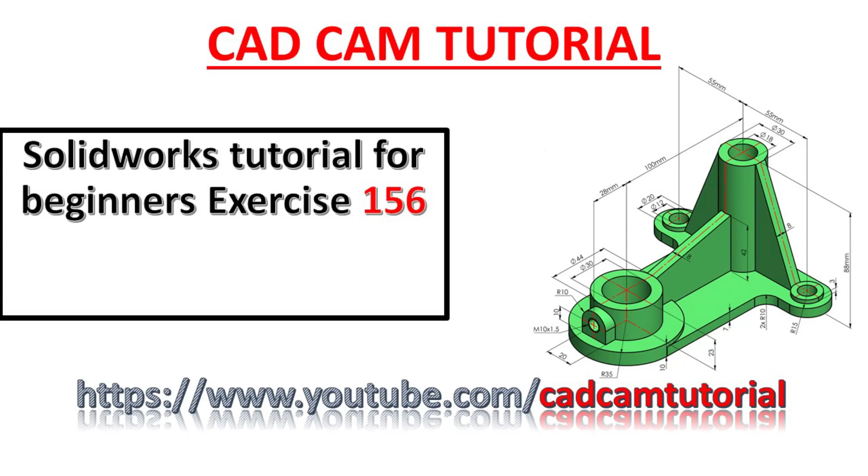So let's start to create, and here we will make this with the help of this 3D drawing isometric view. So here this is our isometric view.

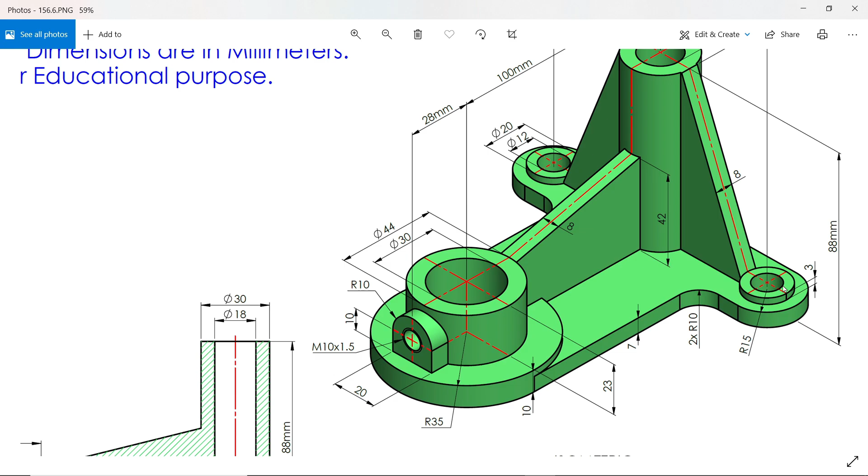Now we will start with base. See base, this end there is a circular profile and that radius 35, diameter 70. Now the second end there is a two circular profile, half circle, radius 15, see this end also, and at center there is one extruded body 10-20 diameter and this thickness 10, and this base flange thickness 7.

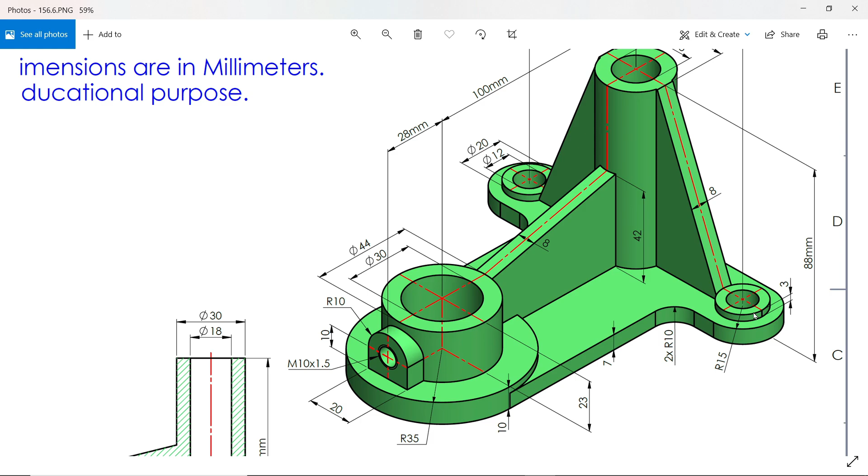So first we will make 7, then we will extrude this little more, this diameter 20 and this thickness 10 millimeters. So first we will extrude, then we will extrude this extra body.

Then at center there is one more extruded body 30 diameter, see this circle, and this height you will see from here 88 from bottom, okay, 88 from bottom.

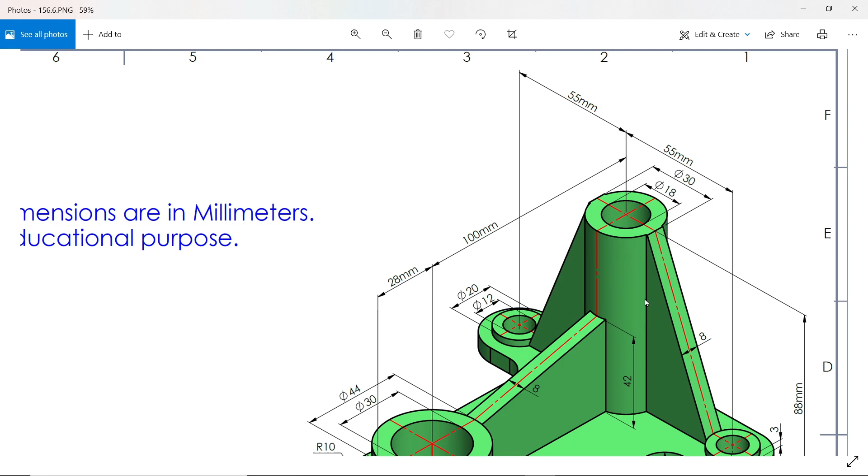So let's make this. And yes, the center distance, see this whole center distance 55, the second one also 55, and this is in one line. See here, you will see. Now first we have to select here.

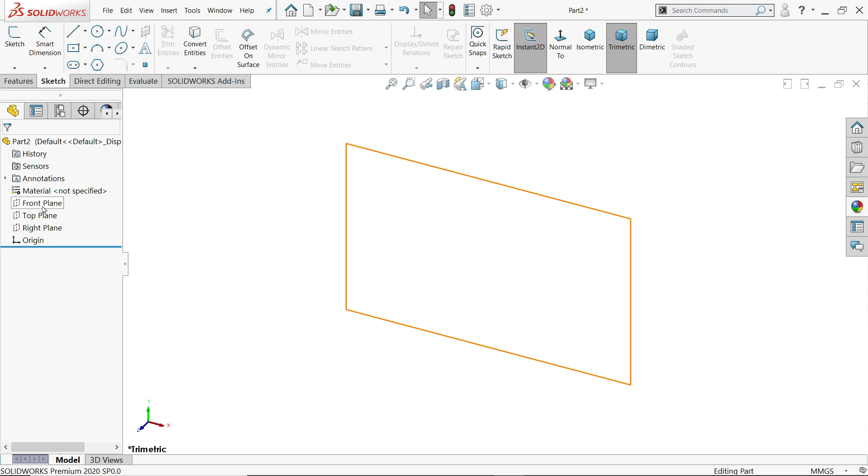Units, millimeter. Now let's start to choose any plane which is suitable. Top plane is the better option, even though you can directly choose extruded boss base feature. Now here let me choose top plane.

Now activate circle tool. Now the first circle 35 radius into 2, 70 millimeter. Now I'll show you one more feature.

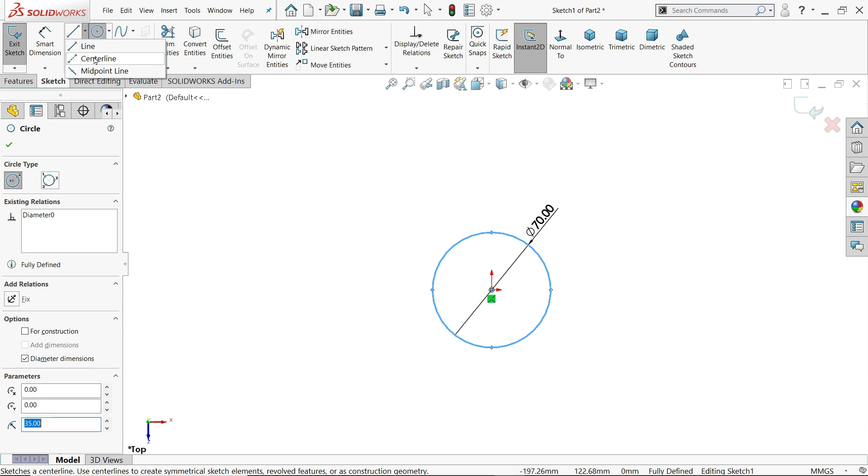Select center, activate center line, draw one center line, escape. Now choose dynamic mirror and select this line. Now whatever things we are going to make in one side, it will reflect other side.

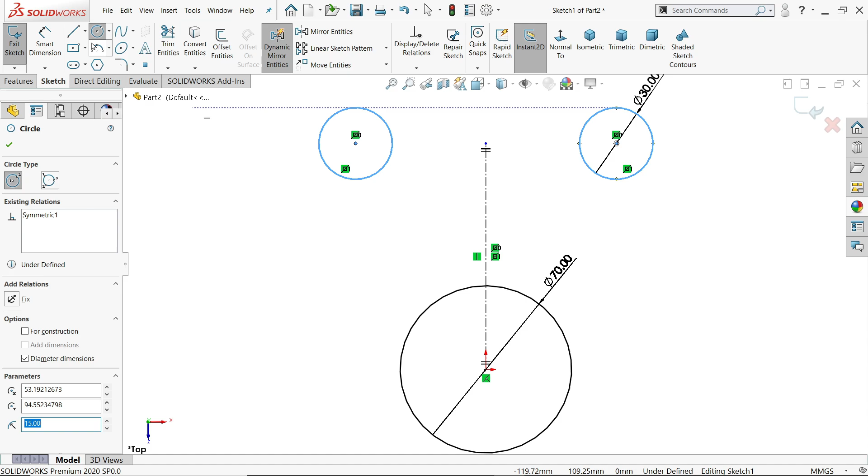Let's say activate circle. Now this diameter 30. Look, it's reflect on other side. Activate line tool.

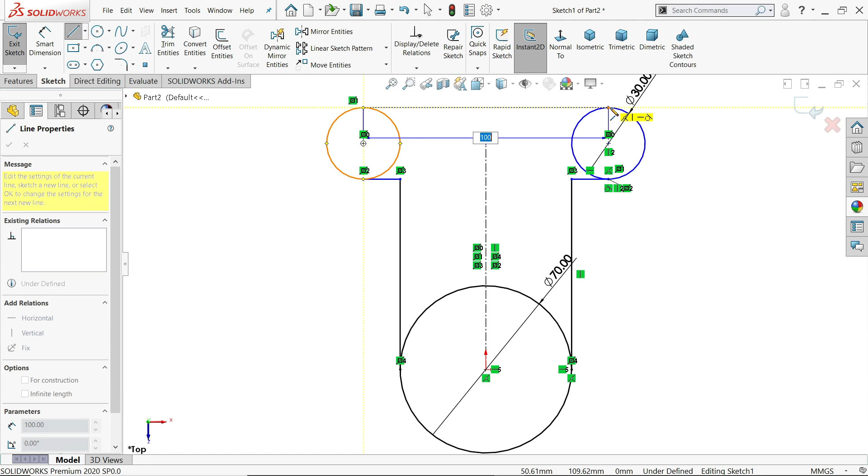Now out of this dynamic mirror, activate line tool, connect with this line, and again activate circle tool. Center also the same diameter 30 millimeter.

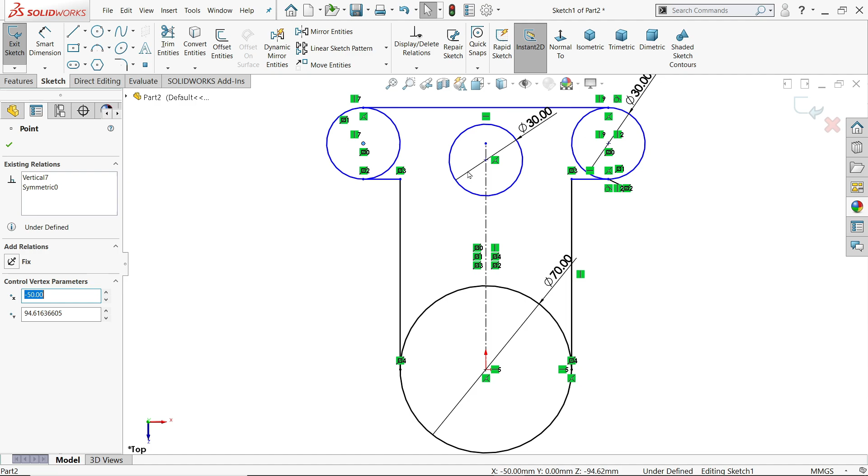But these are in one line, so I'll choose these two center points of these two circles, horizontal. Activate smart dimension tool. Now this distance from this end to this end 100 millimeter.

Now distance from here to this line, center distance, say 55 millimeter. Look.

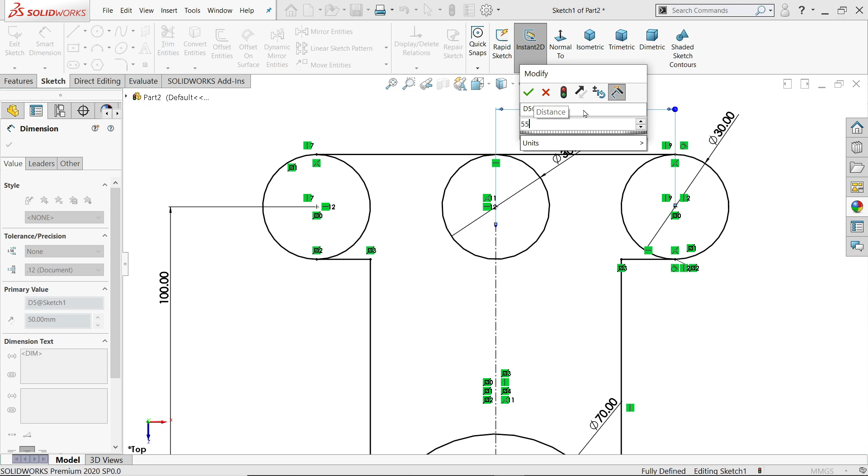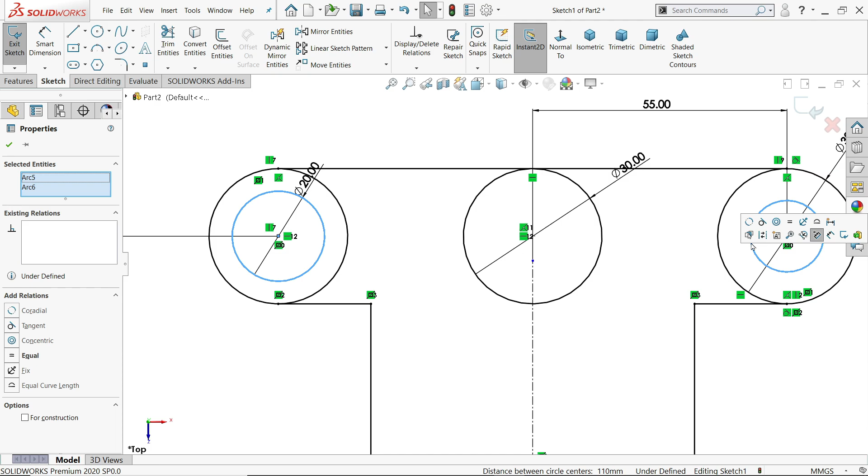Again activate circle and let me draw two more circles, 20, escape key to out. Now hold shift key and select both the circles and leave, and you will see a small window pop up here or at right left bottom, equal constraint.

See, this is fully defined sketch. If I am going to say exit, now see it is automatically going to extrude because there are too many closed profiles. So you have to choose in selected contour, you have to choose one by one all.

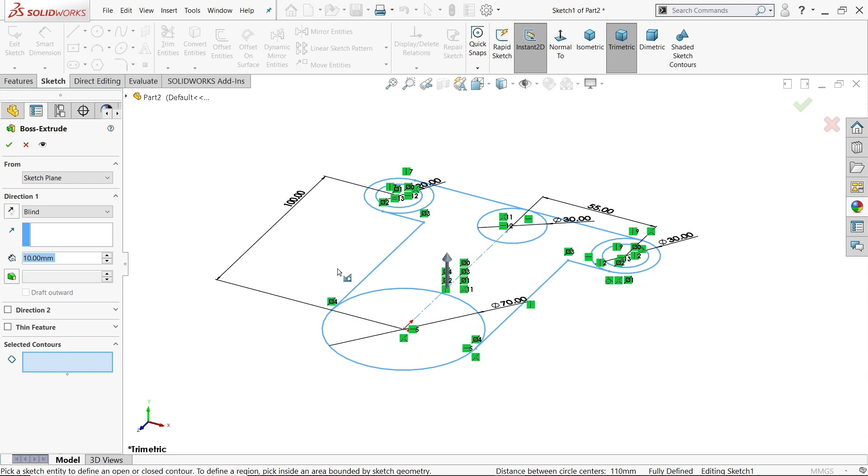Sketch plane, end condition blind, and how much depth, first is 7. Now let's define the things which we need to make.

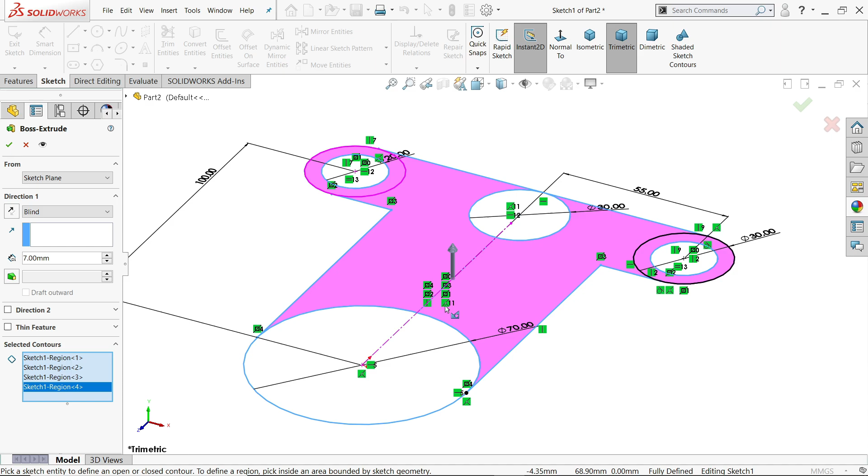Now still it is pink, means some error is there, so let's I am going to choose these all. Center one, even though you can leave, but let's say.

Delete also, it's not going to affect, but if I am leaving this there will be a problem, so let's keep this one as it is.

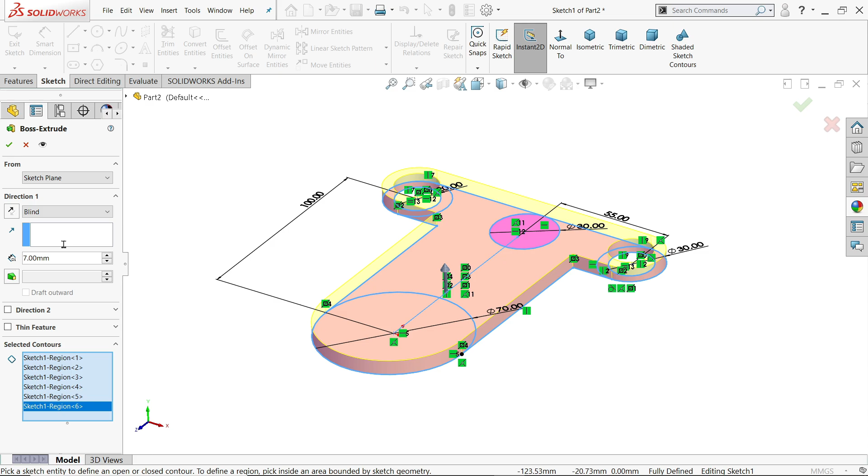7 millimeter, okay. Now again click on the same sketch, extrude.

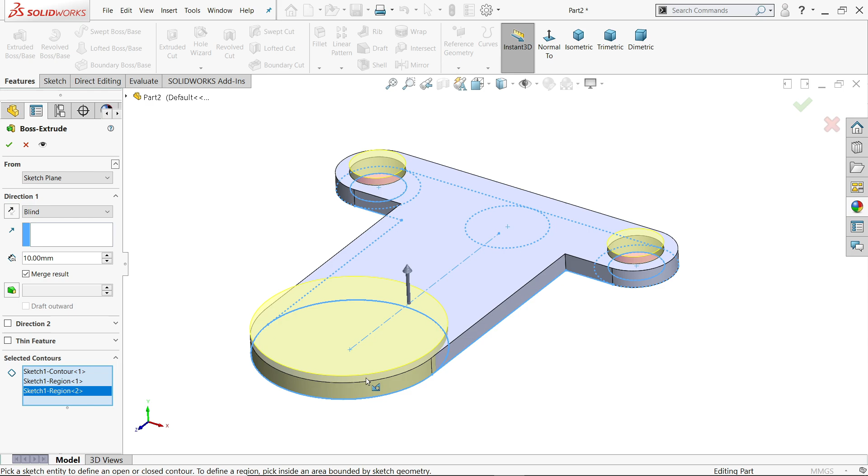This time I am going to choose in selected contour this one, this circle, center circle, this circle, and the depth end condition 10 millimeter, because this is 3 millimeter away from here and this is 10 millimeter. Keep results merge, say yes. Look.

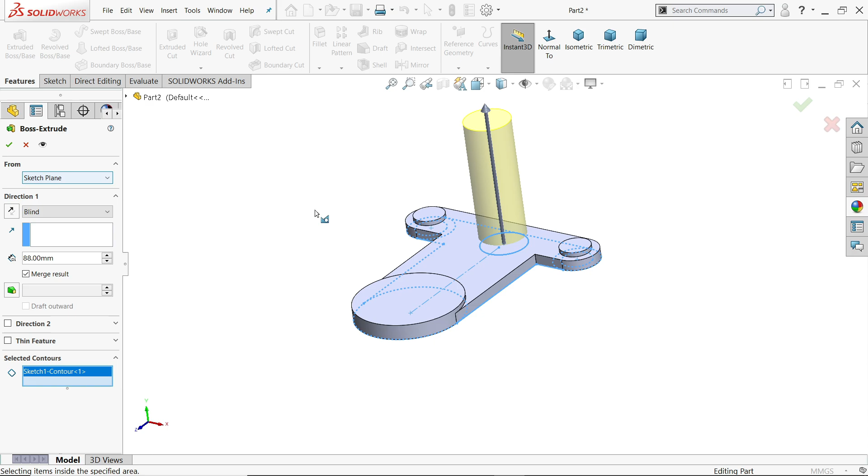Now again I am going to select extruded boss base. Now in selected contour I am going to choose this one. See, we are going to extrude this only, and end condition 88. Now mean start condition keep same as the plane. Look.

Let's make this circle 44 diameter and depth 23 from this face, then 28 millimeter away from the center line of this we will create this body, this radius 10, and 10 millimeter is the distance, and there is a machine thread M10 into 1.5, 20, and this is throughout a hole.

Up to this body, we will make this, and we will create these holes. See, 30 diameter holes, then 12 diameter holes and 18 diameter holes.

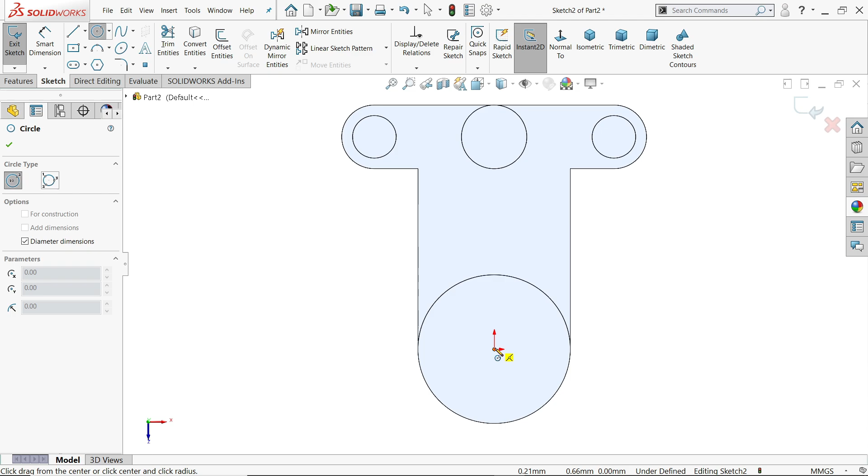So let's try this sketch. Now 44, go to feature and select extruded boss base and keep end condition 23 millimeter, blind 23 millimeter, plane this is already selected, merge result.

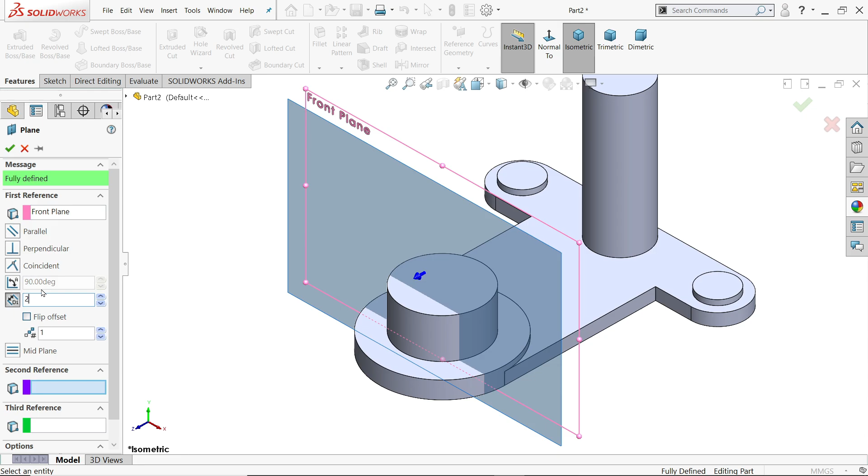Now front plane, go to drop down the reference geometry plane and here put distance 28 millimeter. See, it's going to create a plane 28 millimeter, say yes.

Now choose this plane, sketch. Now let me activate line tool. I'm going to create with line tool.

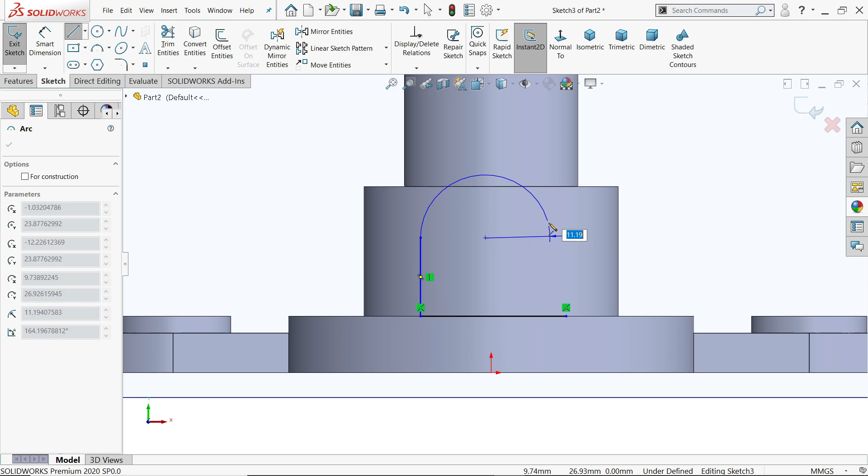Go back to the point and see it's automatically converted into an arc. Just make a closed geometry.

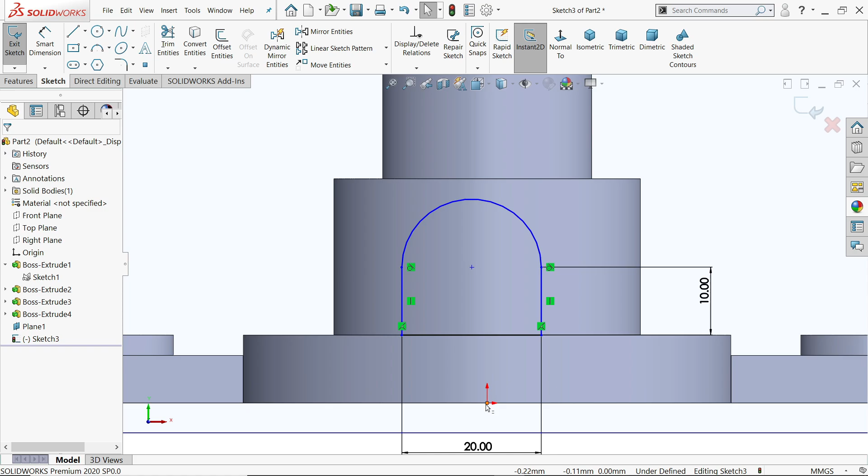Okay, let's define this: 20, 10. Hold shift key and select the center point vertical. See, this is a fully defined sketch.

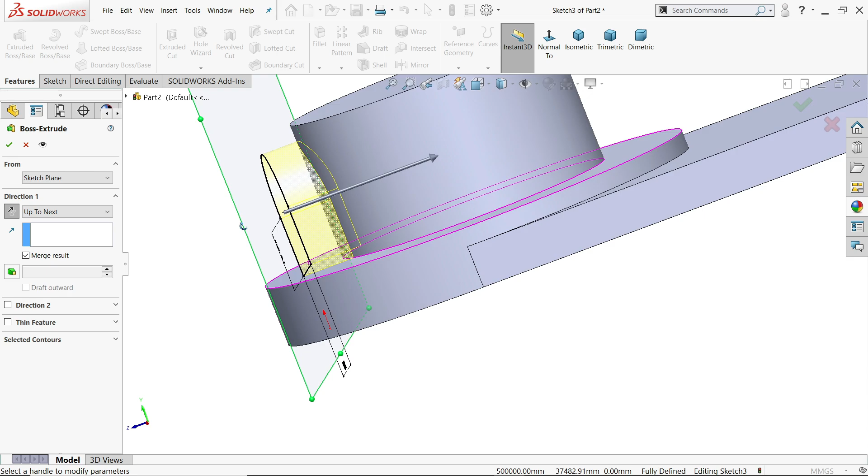Now let's select extruded boss base, reverse, and here end condition keep up to next. See, it's going to fix only up to this face, say yes. Look.

Click hide. Now here we have to create all the planes, so either we choose all the faces separately and create, or otherwise let's go back side.

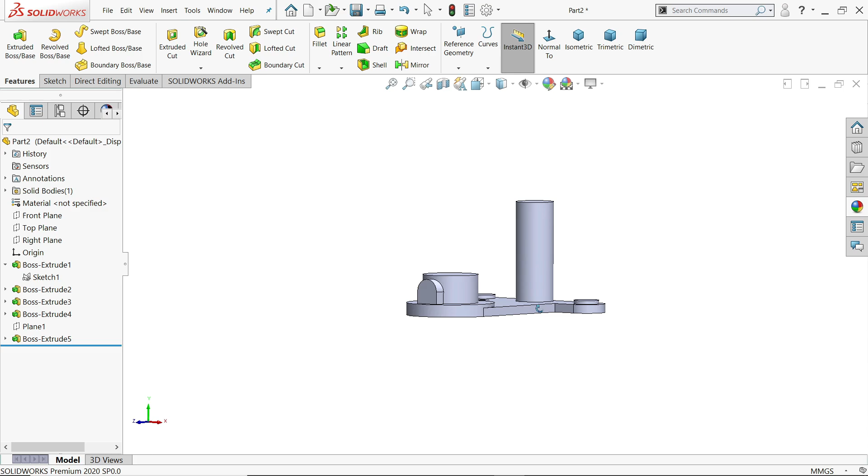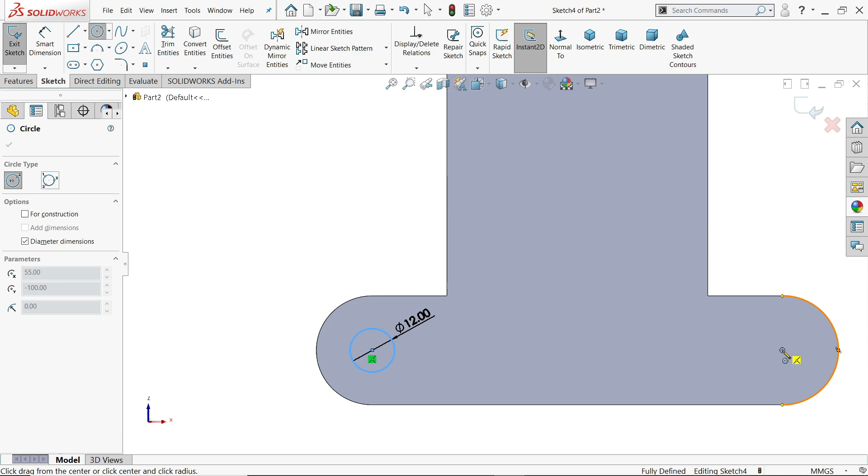Sketch. Now first circle, activate circle tool, 30. Now here the second circle, this is 12. Now here we have one more circle and that is 18.

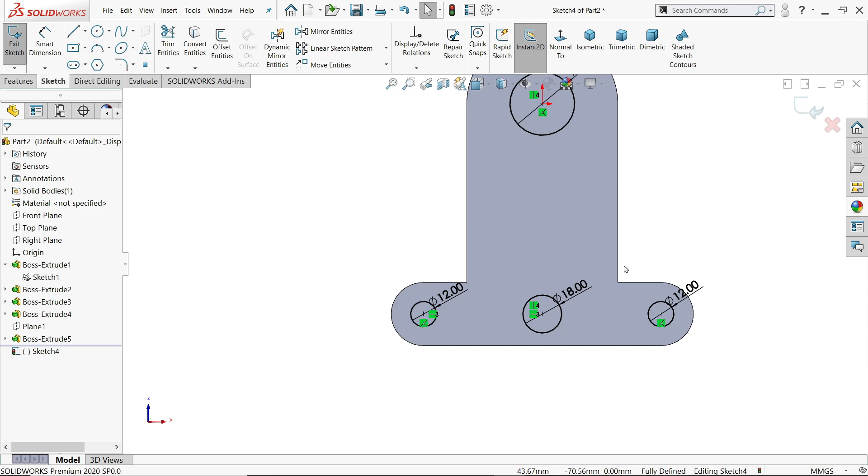Now hold shift key, select this origin point and this point vertical. Now this is a fully defined sketch.

Activate extruded cut feature. See, all selected, isometric view. Now here choose end condition through all. Look, all going to cut. That's it.

Hole wizard. Now here click this straight tap. Metric, tap bottoming hole. We want a straight hole with thread.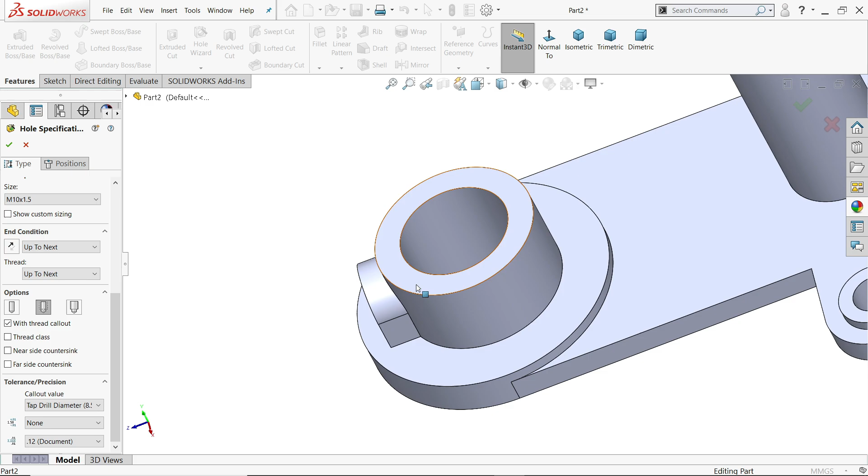Now here already we selected 10 into 1.5 thread. Now end condition is next, meaning it's going to cut up to the inside wall and thread also up to the inside wall. Now here I am going to choose these cosmetic threads, I want to show here, so just click with thread callout and keep rest all as it is.

Now show position, click on this face and just press somewhere like here, click smart dimension and just define the dimension 10 millimeter.

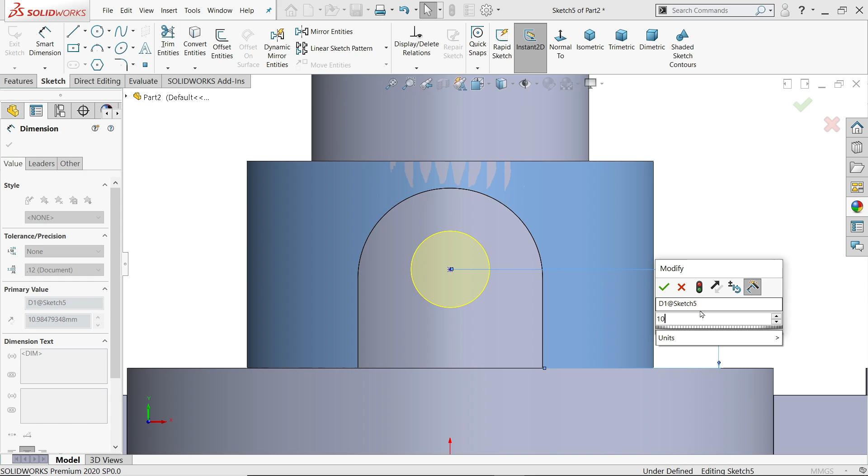Escape key and hold shift key and select this one and origin point. Vertical relation. Now this is a fully defined sketch.

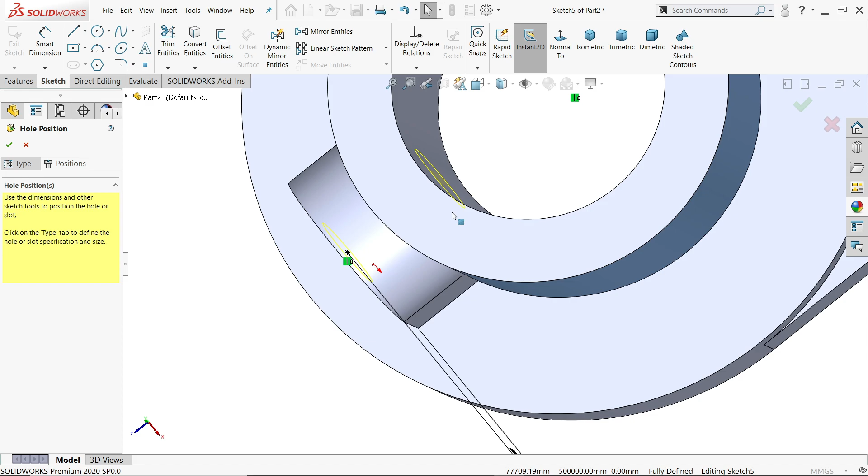Check isometric view. It's going to cut up to inside wall. Look. Now you will see the symbol of major and minor diameter.

Just go to options, document properties, detailing, shaded cosmetic thread. Okay, now you will see thread. That's it.

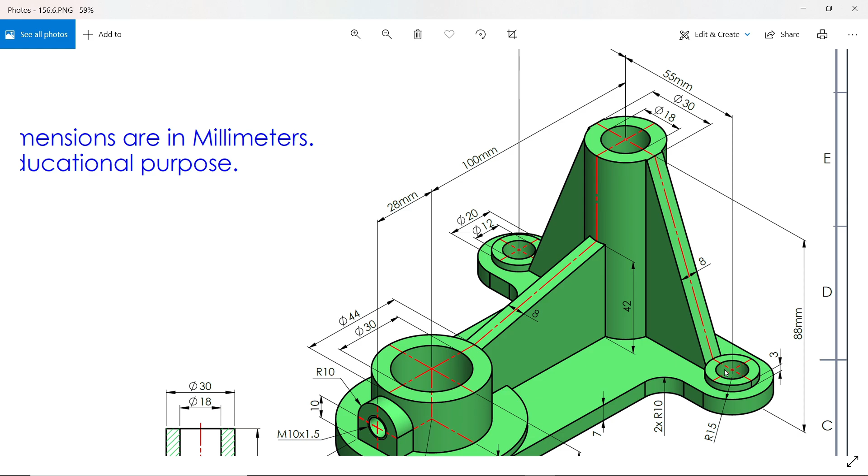Now it's time to add fillet ribs, 8 millimeter. This lies at center, here also 8 millimeter. And if I choose section view, see this lies from this corner to here and the depth 42.

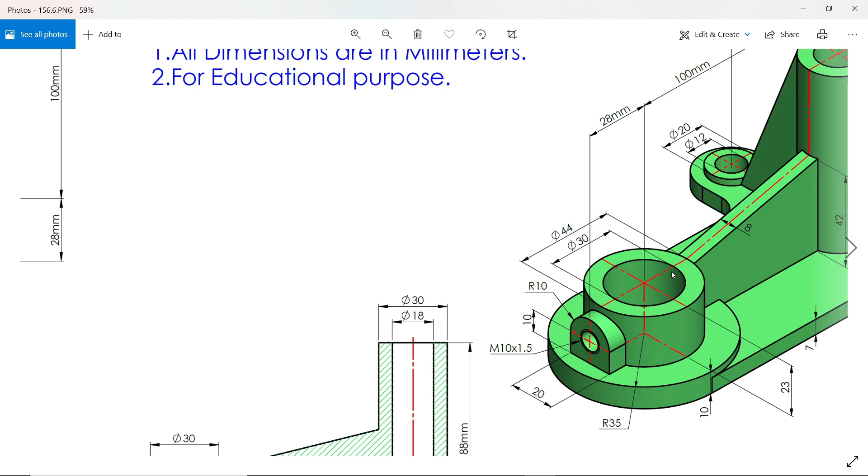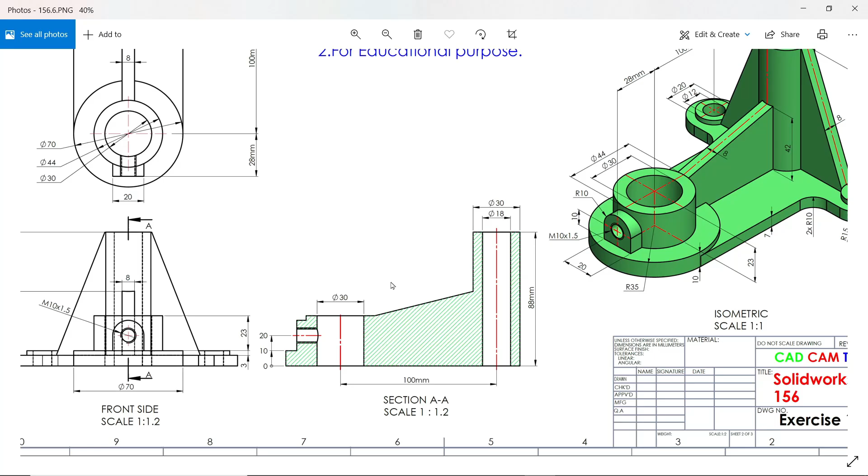Here is mentioned this depth 42. And here also it is going to coincide with this upper point, not bottom point, upper point. See here.

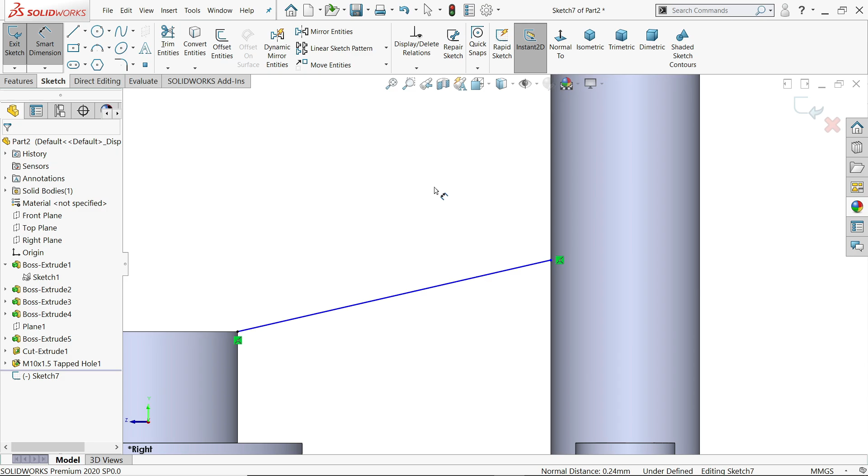First right plane, sketch, line and connect from here to here somewhere. Hold shift key, select the outer edge and this point, coincide. Dimension 42. Go to feature and activate rib.

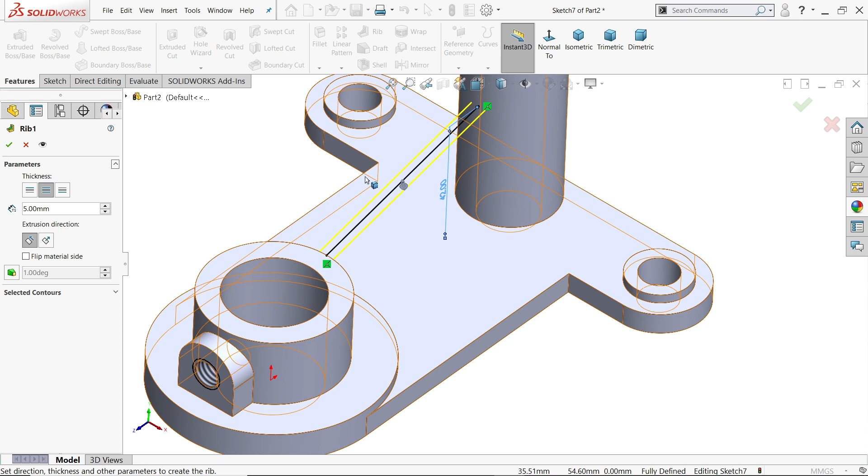Now see, this direction is downward. Depth 5 millimeter, and here condition we keep both sides, so we want to move in both sides. Say yes. Look.

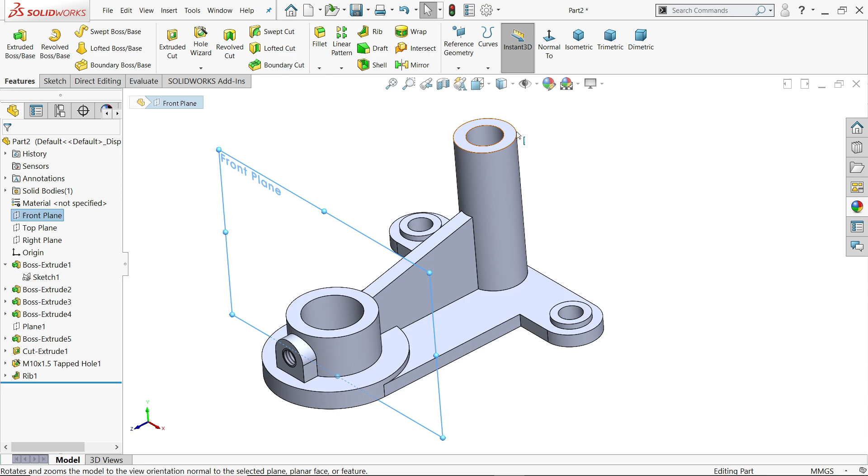Now for creating rib here we have to create first plane, so I am going to choose front plane. Temporary activate temporary axis. Plane. Now this one already selected.

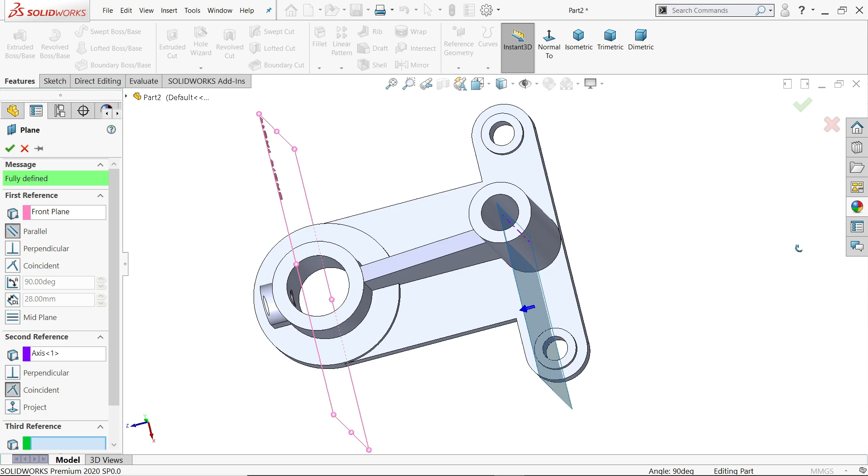In second reference I am going to choose this axis. Look. Parallel, see here. Say yes. Now hide this temporary axis.

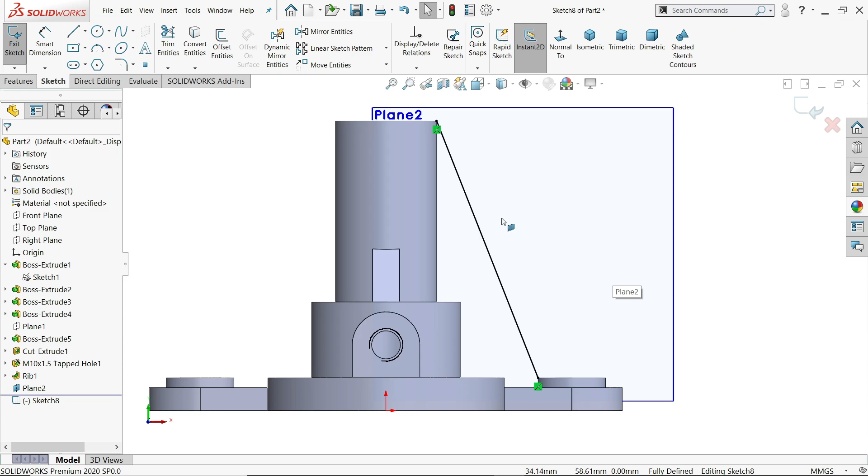Now select this plane, sketch, line. Now this is going to start from here to here. See, this is fully defined, no need to define, but still there is a catch because it's difficult to create rib on circular face. Now here both the ends are circular. So let me try and show you.

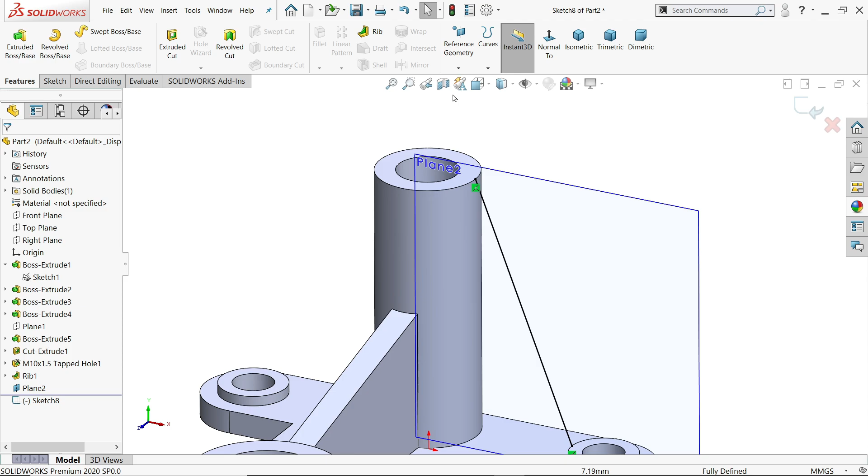Thickness we will keep both sides, 8 millimeter, direction also perfect towards body. Say okay. Now it shows it does not exist or something like some error. So what we will do, let's add one little line, extend this line to here, let's say 1 mm.

Escape. Because this is circular face, it is not going to create a straight line like this. This is still a difficult thing, still a kind of bug in SolidWorks.

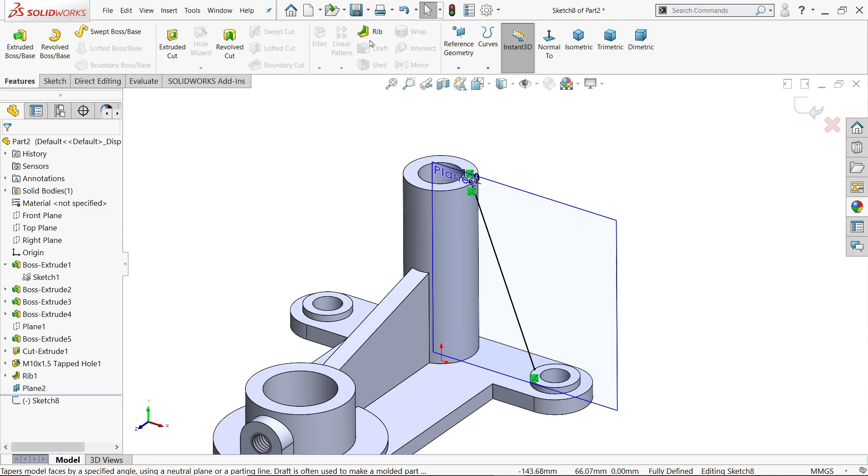Rib. Now this time 8 millimeter, both side, direction also towards body. Say okay. Look, it's created.

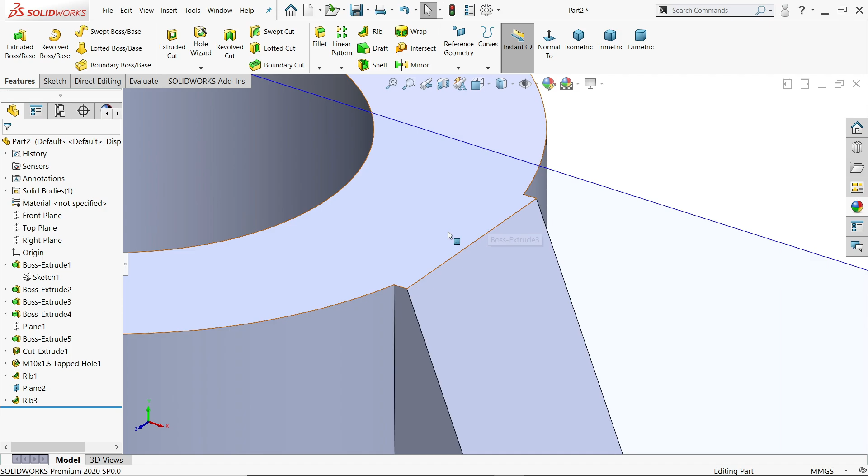See, these points, center point meets with this circle, but these are the things which we have to apply or little extend inside.

Click and hide. Now let's mirror this. Click mirror. Now plane, right plane, this is the reference plane. Mirror feature, I'll choose this. Say OK, it's mirrored. Look.

Solid color, let's say green.

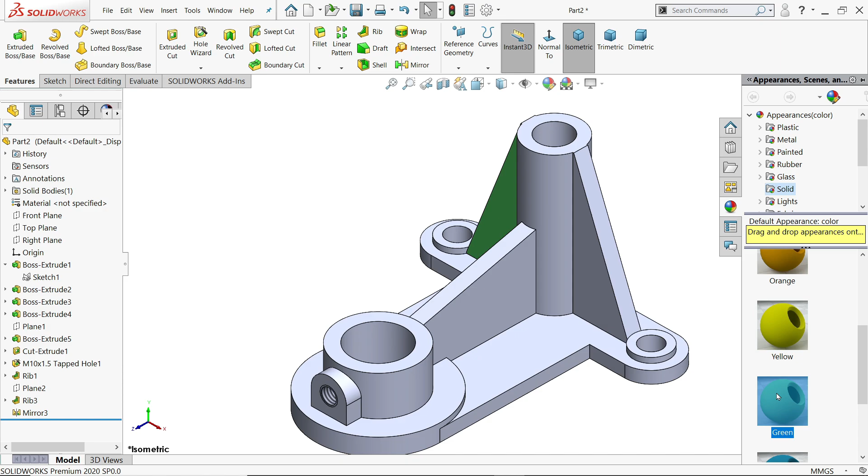Sorry, we forgot to add corner fillet, so click on this edge, fillet. Keep fillet type constant size fillet. Here select show selection toolbar, tangent propagation, full preview, symmetric 10 millimeter.

And here also you will find something like this, see, 10 millimeter symmetric, say yes.